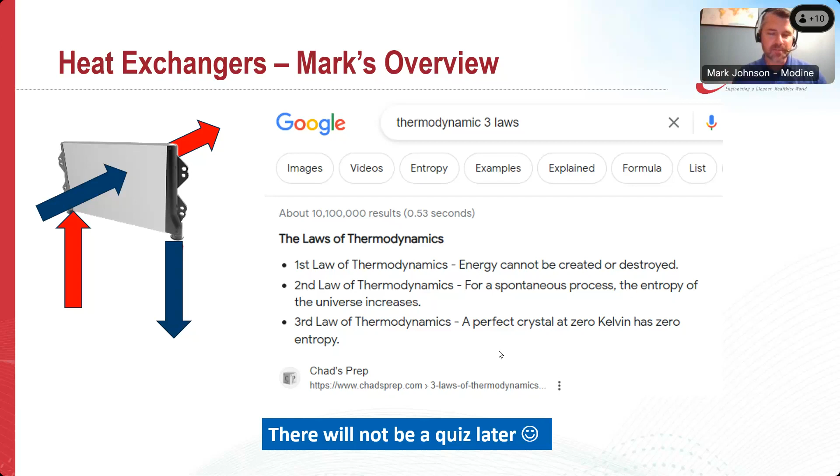So if we think of the gas we put into our car, or if it's an electric vehicle, everything we put in doesn't convert directly to powering that vehicle. There's some loss, some waste heat that comes out of it. And the third law, I don't even want to get into, and no, there won't be a quiz at the end of this. This is just a means of level setting heat exchangers, what they're doing, and really how complex they can be and how they're really all around us.

So like I mentioned, they're there for a purpose, to exchange heat from one fluid to another, but why is that important? This could be comfort, heating or cooling, like air conditioning. It could be in refrigeration and the cold chain, thinking about how do we get food from farm to table, especially if that farm is overseas. We provide different heat exchanger solutions for ocean going boats and transportation, all the way to over-the-road transportation, and then also in supermarkets.

And of course, we all have refrigerators in our homes. There's plenty of heat exchangers in different process cooling applications, whether you're talking about making plastic bottles that soda might go into, or more complex industrial systems. A lot of different heat exchangers are embedded in that equipment.

And then, of course, engine cooling. Again, Modine, depending on who you talk to, is still viewed as primarily an automotive company. I'll make the case soon that we're more of a diversified industrial company, but certainly we have sold a lot of radiators, developed a lot of radiator technology, and this is a key component for ICE engines, and now we're doing similar work for battery thermal management.

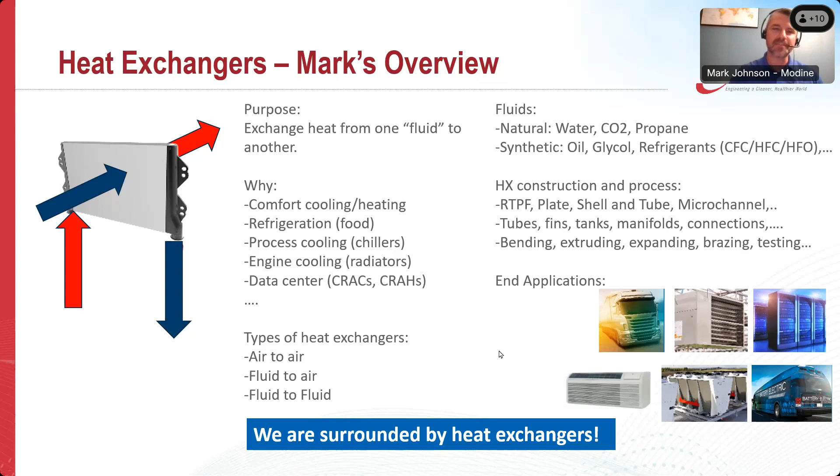So for large stationary generators for either mission critical or backup power, we provide similar engine cooling to those types of applications. Liquid cooled applications, this is where the heat exchange is happening from, say, water to refrigerant or water to oil - so liquid to liquid heat exchange. Automotive oil coolers are a great example of this. So we have a lot of shared customers between air and liquid cooled, but we saw the technology being different enough, and even what the customers are valuing being different enough, where we broke this into two distinct business units, and both have benefited from that separation and that focus.

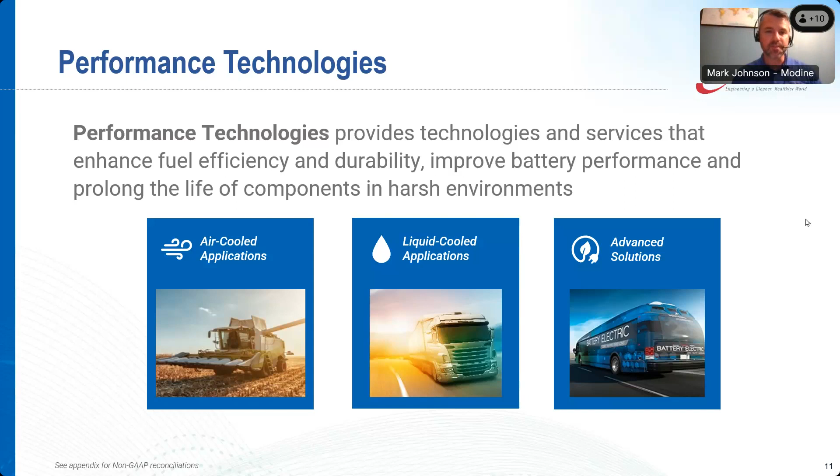Going a little bit deeper into these air-cooled applications—off-highway, power generation. This market continues to grow as we think about our electrical grid and more vehicles converting from ICE to EV, more smart electronics around us every day. We need more and more electricity, and at the same time we're talking about decarbonization, so power generation, clean power generation—we see this as something that'll continue to grow in a space where Modine is well positioned to be part of that solution, whether it's diesel, potentially natural gas or propane generator solutions operating as efficiently as they can. We also see our heat transfer technology adapting to cleaner fuels like blended hydrogen or even hydrogen fuel cell. We have technology that will help put those new solutions in place as fast as they can be adapted.

And then commercial vehicle—we'll continue to need these Class 8 trucks and other vehicles to deliver products and food and other things we need throughout our country and throughout the rest of the world.

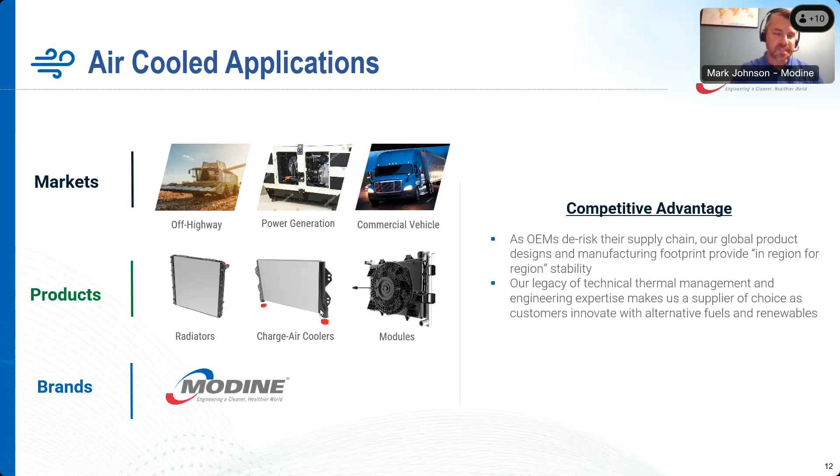These air-cooled applications are rejecting heat typically out to the atmosphere. On the liquid-cooled side, we've got two different fluid streams where we're still moving heat around, and it ultimately makes its way back to an air-cooled heat exchanger to reject it out to atmosphere. But it's much more efficient to move that heat away from the source with a liquid, and then get it to maybe another part of the vehicle where you have the benefit of more surface area, and then reject that heat ultimately out to the atmosphere. So these are different sort of intermediate heat exchangers that can be put into the systems to manage those heat loads and ultimately hit the vehicular performance goals they're looking for.

In commercial vehicle and automotive, most of the time that is fuel efficiency driven, and in off-highway there are emission levels handled by exhaust gas recirculation coolers.

This technology helps a lot with meeting the different emission tiers that have been rolled out from a regulatory standpoint. So again, you see a lot of aluminum, a lot of stainless, a lot of engineered plastics. Again, really needing to understand the durability requirements, the life requirements in these different end markets.

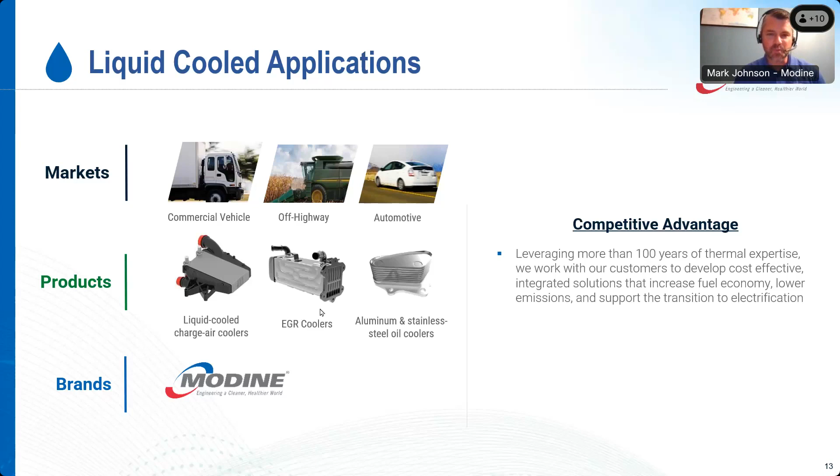Of course, if there is an issue, whether virtually or in the physical testing, we can quickly address that and design a solution to meet whatever that failure mode might be. And at the end, if we want to talk about common failure modes or impacts on manufacturing processes of these different heat exchangers, I'm happy to do that.

Advanced solutions, this is the deep dive into the last part of performance technologies, where again we're looking at these niche markets - bus, truck, specialty vehicle, last mile delivery - where we can provide technical support, not just heat exchangers, but systems that can go into these electric vehicles and even some fuel cell packages, where there are startup companies that really enjoy being able to work with a company like Modine that can come in and give them a complete solution for, say, battery thermal management. That's one less thing they have to worry about from a supply chain standpoint, from an engineering standpoint. We can solve a bigger part of their overall problem.

And in many applications, not only do they need battery thermal management, but they need to be able to manage the thermal needs of the other electronics on the vehicle. And we have other packages for those applications as well. So here we're providing pumps, compressors, heat exchangers, software, firmware, the controls to interface with their system - a true plug and play subsystem. The light duty passenger vehicle makers tend to have the engineering teams and don't require this assistance, so we're filling a critical need in these more specialty vehicle environments.

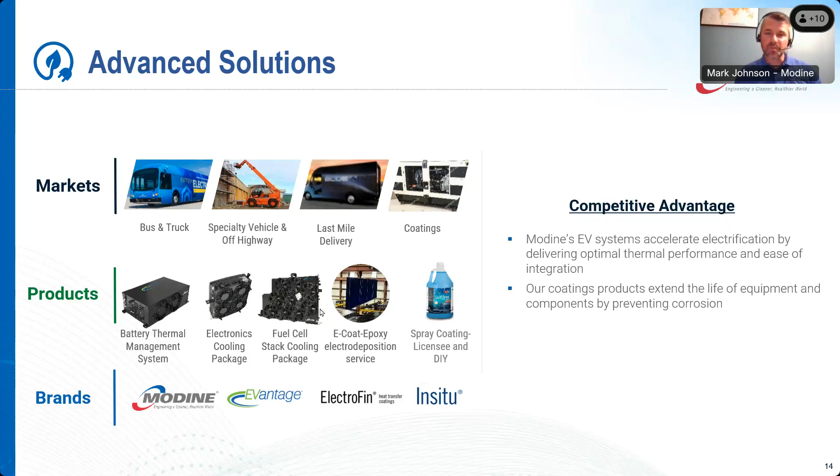This includes cleaners, so you can clean the coils in the field. You can get any salt that may have already built up after some initial use in these coastal environments. And then you can provide aftermarket coatings onto the heat exchangers and also onto the cabinetry. So again, this is about extending the life of the heat exchanger and also extending the performance through proper maintenance.

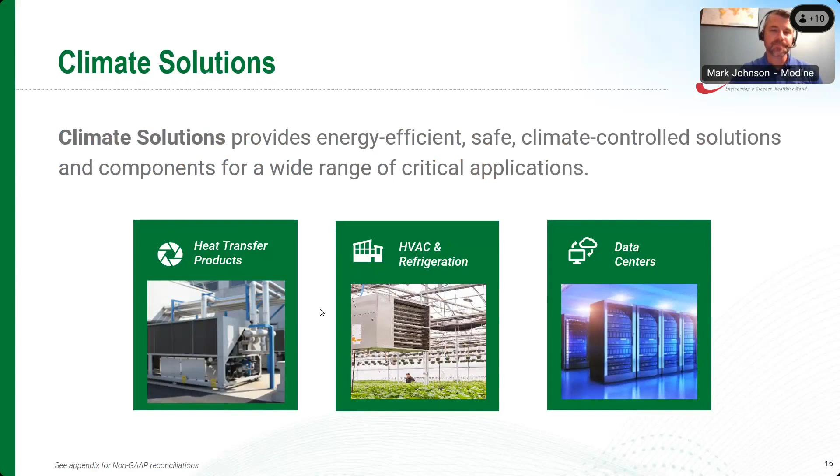So the first one, heat transfer products, again a big portion of our business, around 25% of our sales. And that's because these heat exchangers can really go into any vapor compression cycle - whether it's commercial or residential HVAC, refrigeration could be on-road, off-road, certainly data centers and heat pumps. This is a big growing opportunity for Modine.

Right now we see it exploding in Europe as they were looking to move away from gas-fired boiler technology for comfort heating. The conflict in Ukraine accelerated that, so heat pumps have really been taking off in Europe, and we're seeing similar trends with less pressure in North America as we look to move away from fossil fuels. Electric heat pumps are a good solution, a good answer, but then it also begs the question - where does that additional electricity come from? An area where Modine, we feel like we can provide multiple solutions to a difficult problem.

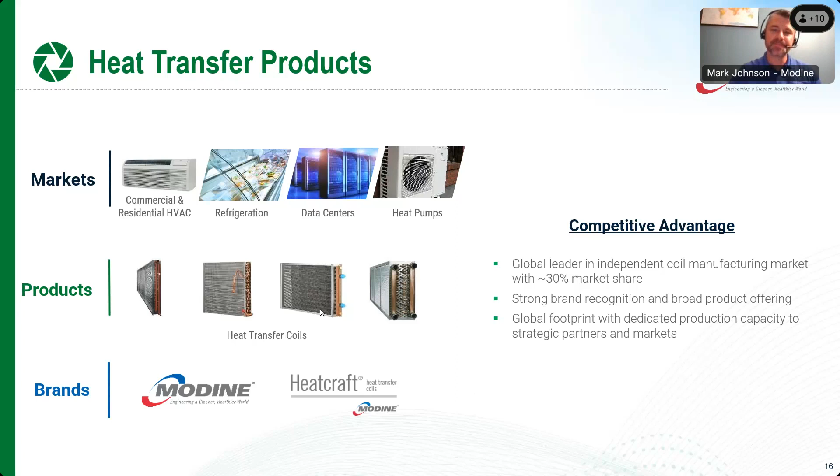In the HVAC and refrigeration space, we've seen examples around heating and unit heaters, which goes right back to our founder A.B. Modine and the innovations he did in his own shop. This has evolved into more of a gas-fired unit heater, and we've got a sub-group specific for residential garage heaters called Hot Dawgs. I hope somebody's heard of that and maybe has one in their garage.

On the ECO side of our brands, this came through the Luvata acquisition that Modine executed about 9 years ago. Time really flies, but these unit coolers came in, and they're in cold rooms, typically coupled with the air-cooled condenser right next to it. So to keep fruits, vegetables, and meat cold, you have to have the indoor unit, and then the outdoor unit to reject the heat.

Indoor air quality, we've got school unit ventilators. These are complete systems, typically air conditioning and heat pump systems. They can be more vertical, a taller, slender version, or they can be under the unit, under the window. They can be short and wide, but they have heat exchangers in here, and a blower, an air mover of some kind.

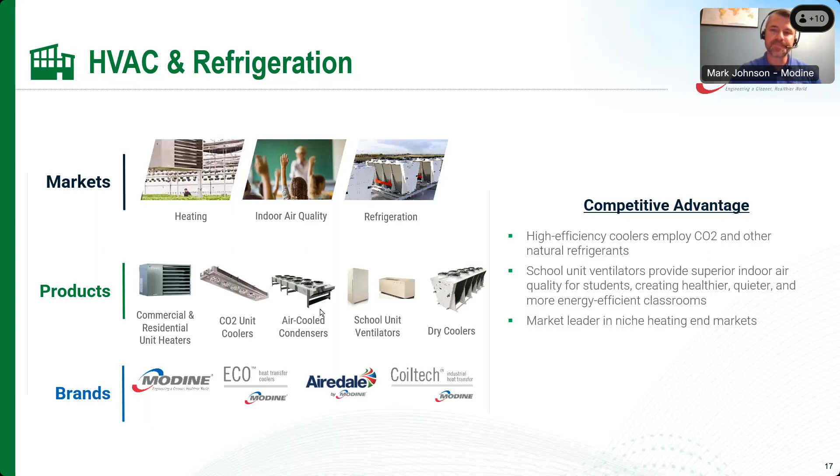And then data centers. Again, if you go to the modine.com investor section, our latest earnings calls, probably the last 3 or 4, have really focused on what we're seeing in terms of data center growth. A lot of these words, like data center engineering, are big words that cover a lot of different areas. In this example, there's co-location, considered smaller data centers compared to hyperscale data centers, and then telecom, which is more distributed but certainly an important and growing part of data center technology.

Here we can have very large equipment like air-cooled and liquid-cooled chillers that can be very modular. These can easily be 10 feet tall by 10 feet wide, and over probably 40, 50, 60 feet. It's very modular - they can build out.

It's more of a question usually of transportation versus how big can we really make them, because not only do you have to get them to the site, they typically have to be picked up by crane or airlifted, depending on the building size and where they need to go. This is another area where the virtual technology team that reports to me looks at not just the application loading, but the transportation loading, and how we get the equipment to site, how we pick it up and place it. The last thing you want is a customer that spent a lot of money on multiple chillers for a rooftop, only to find the lifting points are insufficient and you get deflection or product damage as they're placed on site. That'd be a disaster. So we take great care not only through the manufacturing process from a quality perspective, but also the transportation and final setting of those products.

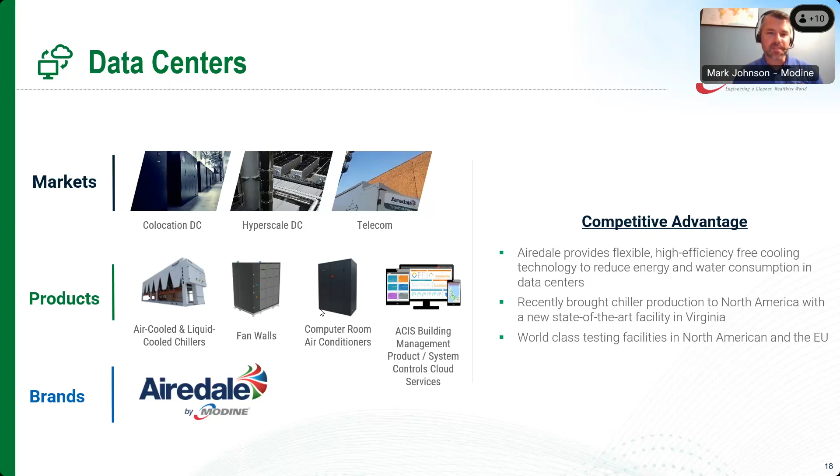So different ways to solve data center thermal management needs, and of course redundancy is critical in these applications. Looking at building controls, the efficiency of the equipment, the uptime of the equipment, water usage. We see some really advanced control systems in the data center space, and also the opportunity to do preventative maintenance and develop new smart solutions in this space. A lot of things happening in data center, and based on even meetings like this that require data center support, we only expect these trends to continue to grow.

It could be price, it could be lead time, could be a number of things, but it really drives strategy, and you can do that when you have a clearer understanding of that market, of that business. That's where being in the smaller businesses really helps, and it builds that high performance culture and organization that's needed to be successful, and we do it through simplification. That's been the beauty of it. It hasn't been we add and add and add. We actually look at where the waste is and how we can eliminate that. Certainly not violate any contracts, not disrupt our customers, but be more proactive and get them away from older legacy technology into newer technology, because we've all seen the challenges with supply chain and other things that has made managing the tail of old technology very difficult.